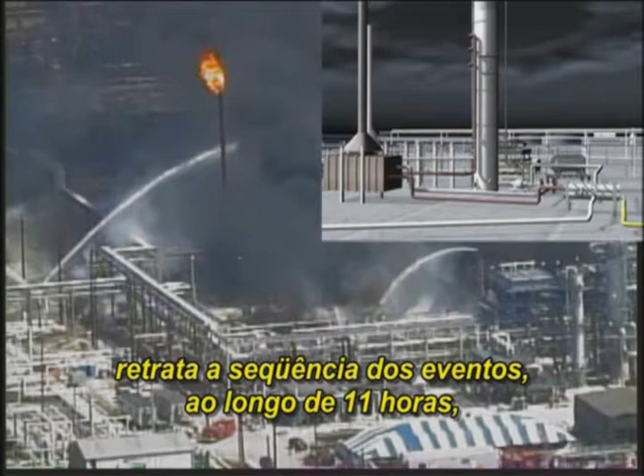The following CSB computer animation depicts the sequence of events over an 11-hour period leading to the explosion at the BP Texas City refinery on March 23, 2005.

Several units at the Texas City refinery had been shut down for lengthy maintenance projects, which required nearly 1,000 contractors to be on site along with BP employees.

BP had positioned a number of portable trailers close to process units for the use of contractors and other maintenance workers. Over a period of months, BP had located 10 trailers for workers servicing the ultra-cracker unit, including a double-wide wood-frame trailer that contained 11 offices and was regularly used for meetings.

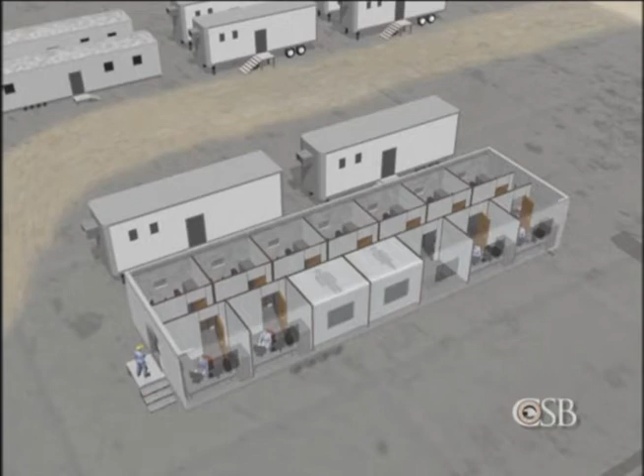Though these trailers were located near the isomerization unit, the occupants were not warned the ISOM unit was about to start up, a potentially hazardous operation.

At 2:15 a.m. on March 23rd, overnight operators began introducing flammable liquid hydrocarbons, known as raffinate, into a 170-foot tall raffinate splitter tower used to distill and separate gasoline components.

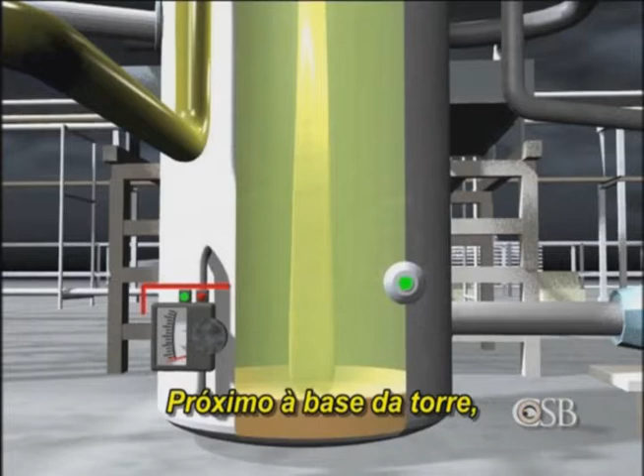Near the base of the tower, there was a single instrument that measured how much liquid was inside. It transmitted this information to a central control room located away from the ISOM unit. But this level indicator was not designed to measure liquid above the 9-foot mark.

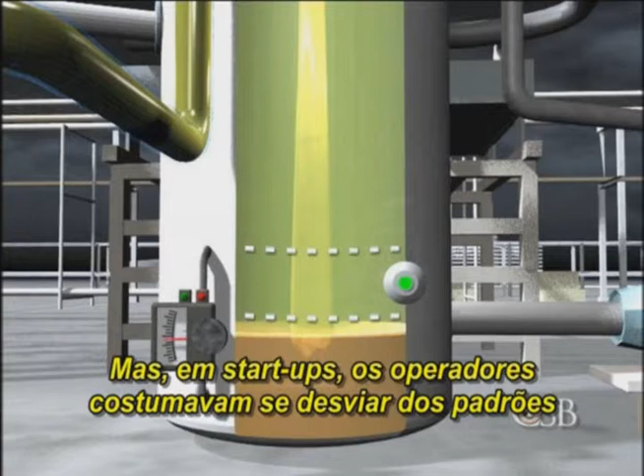During normal operation, the tower was only supposed to contain about 6.5 feet of liquid. But during startups, operators routinely deviated from written procedures and filled the tower above the 9-foot mark, concerned that if the liquid level fluctuated too low, it would cause costly damage to the furnace.

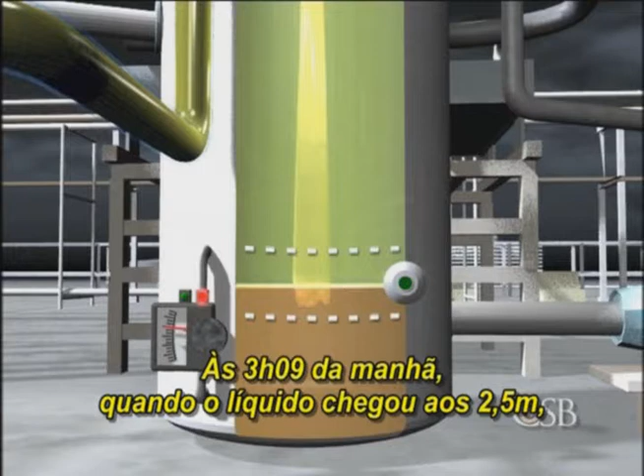At 3:09 a.m., as the liquid neared the 8-foot mark, a high-level alarm activated and sounded in the control room. But a second high-level alarm, slightly further up the tower, failed to go off.

By 3:30 a.m., the level indicator showed that liquid had filled the bottom 9 feet of the tower, and the feed was stopped. The CSB later estimated that the liquid was, in fact, at a height of 13 feet. But operators could not know the actual level because the indicator only measured up to 9 feet.

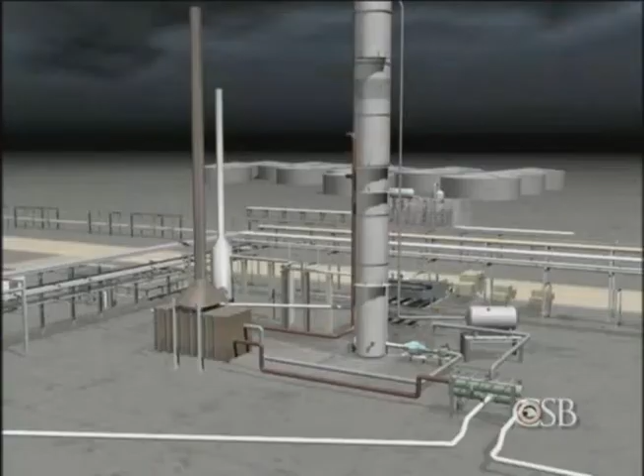The lead operator had been overseeing the startup from a satellite control room within the ISOM unit. At 5 a.m., he briefly updated the night board operator in the central control room about the startup activities. The lead operator then left the refinery early, an hour before the end of the shift.

A new board operator arrived in the control room around 6 a.m. to start his 30th day in a row working a 12-hour shift. He spoke briefly with the departing night shift operator and then read the logbook to prepare for the startup. But the logbook did not clearly indicate how much liquid was already in the tower and equipment, and it left no instructions on routing of the liquid feed and products when the startup resumed. Instead, the control board operator only found a one-line logbook entry that said, ISOM brought in some RAF to unit to pack RAF with.

At 7:15 a.m., the day shift supervisor arrived. Because he was more than an hour late, he received no formal briefing from personnel on the night shift about conditions in the ISOM unit.

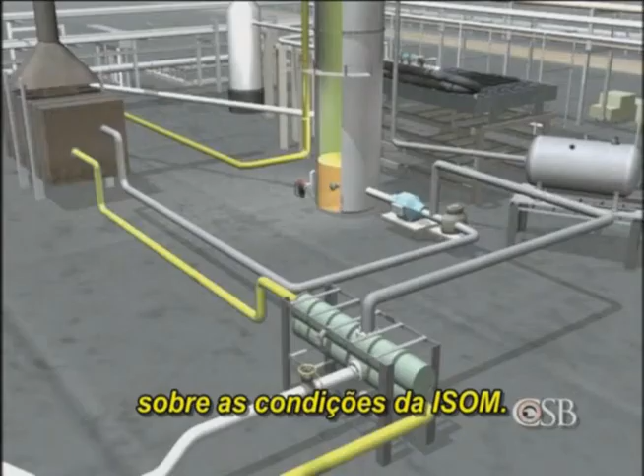At 9:51 a.m., operators resumed the startup. They began recirculating the liquid feed and adding more liquid to the already overfilled tower. As new feed was added, startup procedures called for regulating the liquid level in the tower using the automatic level control valve.

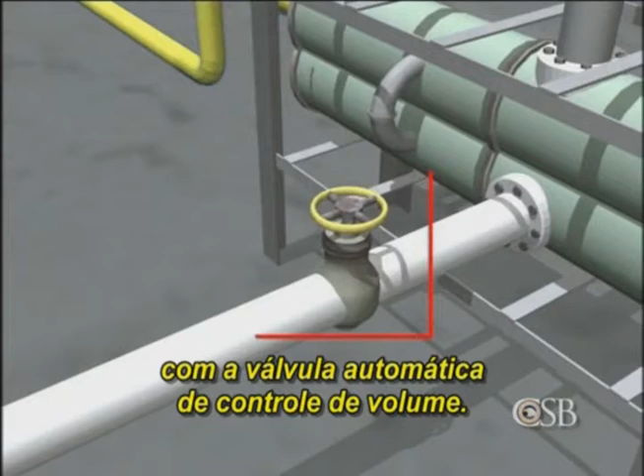But the board operator and others had received conflicting instructions on routing the product. As a result, this critical valve was left closed for several hours, blocking the flow of liquid from the tower.

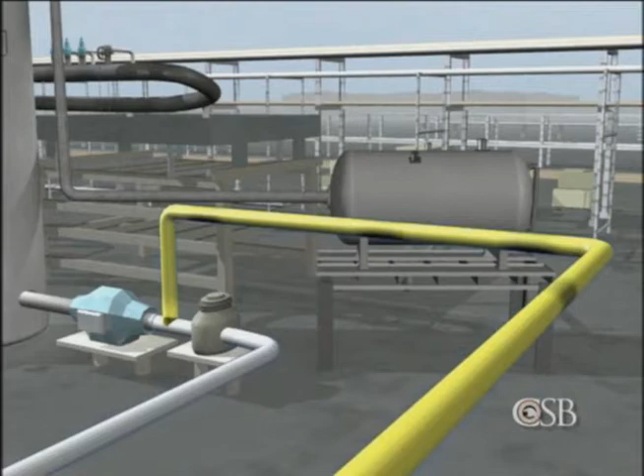A few minutes later, operators lit burners on the furnace to begin heating up the feed, part of the normal startup process. While the startup was underway, the day supervisor left the refinery on short notice just before 11 a.m. to attend to a family medical emergency.

Contrary to BP's own procedures, no experienced supervisor was assigned to replace him. This left a single control board operator, now without a qualified supervisor, to run 3 refinery units, including the ISOM unit, which needed close attention. The refinery had eliminated a second board operator position following corporate budget cuts in 1999 after BP acquired Amoco.

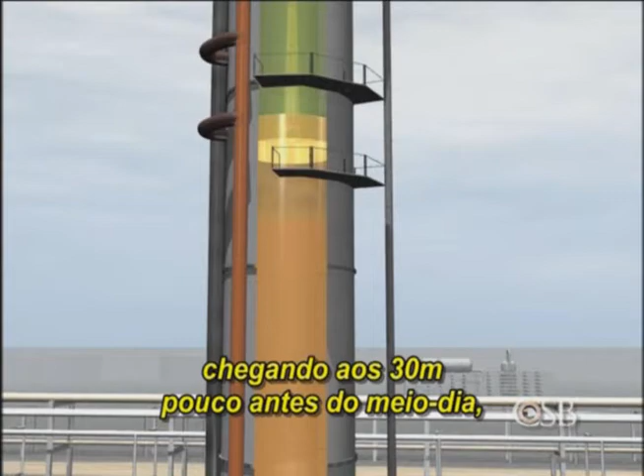As the startup continued, the tower steadily filled with liquid, reaching a height of 98 feet shortly before noon, more than 15 times the normal level.

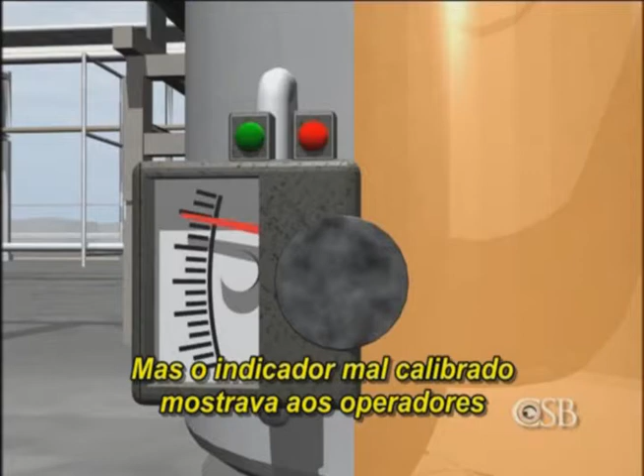But the improperly calibrated level indicator told operators in the control room that the liquid was at 8.4 feet and gradually falling. Furthermore, the control panel was not configured to clearly warn operators of the growing danger. It did not display flows into and out of the tower on the same screen, nor did it calculate the total liquid in the tower.

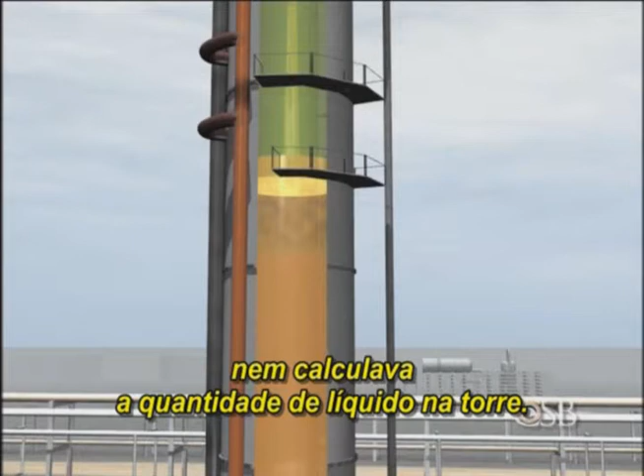Meanwhile, the maintenance contractors, who were not involved in the operation of the ISOM unit, left their work trailers to attend a company lunch, celebrating a month without a lost time injury.

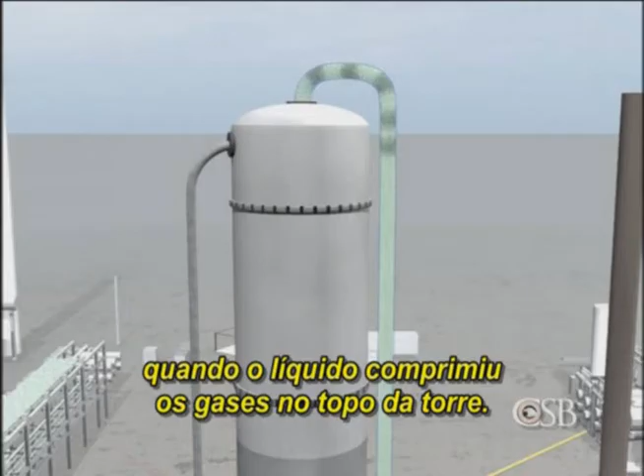At 12:41 p.m., an alarm activated as the rising liquid compressed the gases remaining in the top of the tower. Unable to understand the source of the high pressure, operators opened a manual chain valve to vent gases to the unit's emergency relief system, a 1950s-era blowdown drum that vented vapor directly into the atmosphere. Operators also turned off 2 burners in the furnace to lower the temperature inside the tower, believing this would reduce the pressure. Nobody knew the tower was dangerously full.

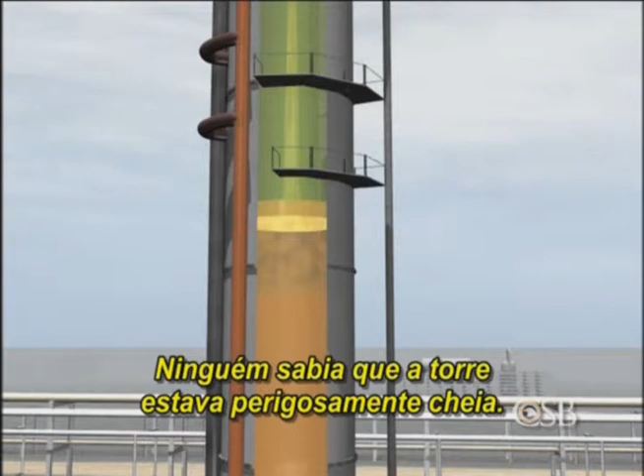The operators did become concerned about the lack of flow out of the tower and began opening the valve to send liquid from the bottom of the tower to storage tanks. But this liquid was very hot. As it flowed through the heat exchanger, it suddenly raised the temperature of the liquid entering high up the tower by 141 degrees Fahrenheit. It was now about 1 p.m.

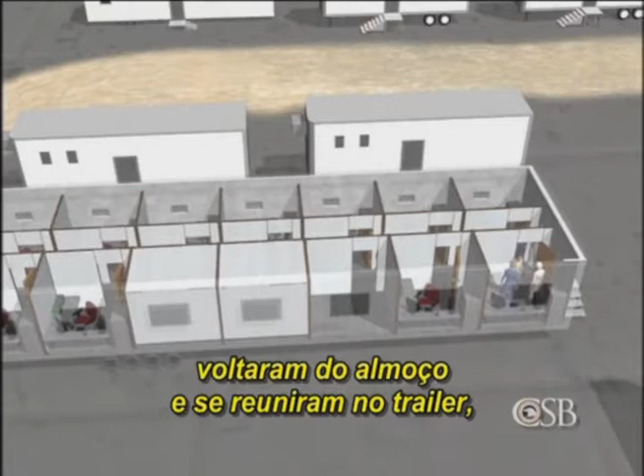Contract workers, unaware of the startup and the looming danger, returned from lunch and began a meeting in the double-wide trailer in the corner room closest to the blowdown drum.

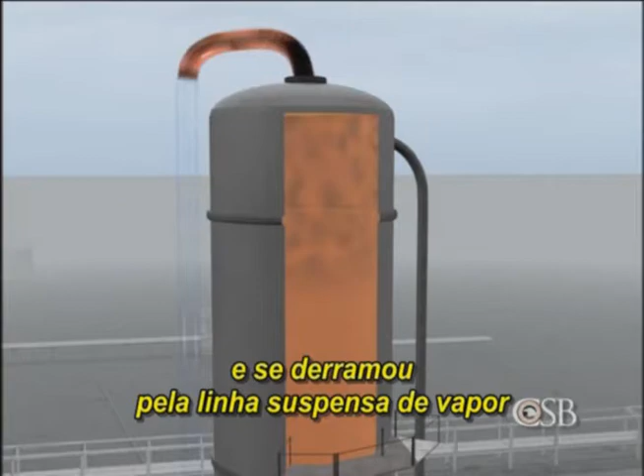Over the next few minutes, the hot feed entering the tower caused the liquid inside to start to boil and swell. Liquid filled the tower completely and began spilling into the overhead vapor line, exerting great pressure on the emergency relief valves 150 feet below.

At 1:14 p.m., the 3 emergency valves opened, sending nearly 52,000 gallons of flammable liquid to the blowdown drum at the other end of the ISOM unit.

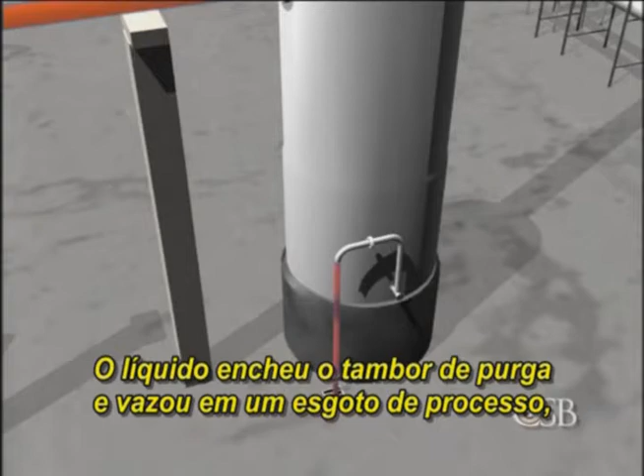Liquid rose inside the blowdown drum and overflowed into a process sewer, setting off alarms in the control room. But the high-level alarm on the blowdown drum failed to go off. None of the operators knew of the catastrophe unfolding in the ISOM unit.

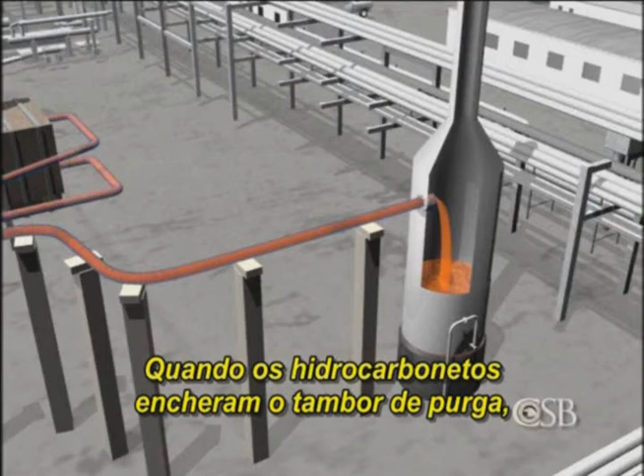As flammable hydrocarbons overfilled the blowdown drum, operators nearby saw a geyser of liquid and vapor erupt from the top of the stack. The equivalent of nearly a tanker truck full of hot gasoline fell to the ground and began forming a huge flammable vapor cloud.

This scene, based on CSB computer modeling, shows how the vapor cloud expanded in just 90 seconds, engulfing the unit and the nearby trailers full of workers.

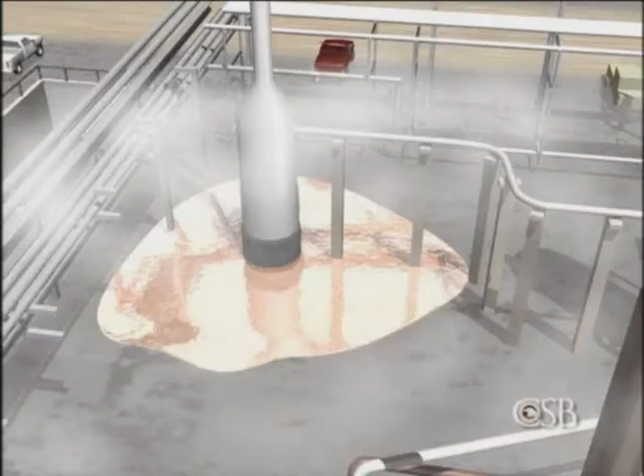About 25 feet from the base of the blowdown drum, 2 workers were parked in a pickup truck with the engine idling. As flammable vapor entered the air intake, the diesel engine began to race. The 2 workers fled, unable to shut off the engine.

Moments later, witnesses saw the truck backfire and ignite the vapor cloud. Powerful explosions swept through the area.

Computer modeling shows how the blast pressure wave accelerated through the ISOM unit, causing heavy destruction and igniting fires throughout the area. The workers inside the trailers were right in the path of the explosions. The fires continued to burn for hours.

12 of the 20 occupants of the double-wide trailer were killed, along with 3 workers in a trailer nearby. Dozens of others suffered serious burns, fractures, and other traumatic injuries. The wood and metal frame trailers were blown apart by the blasts.

Firefighters struggled to rescue the injured and recover the victims. 50 large chemical storage tanks were damaged, and the ISOM unit remained shut down for more than 2 years.

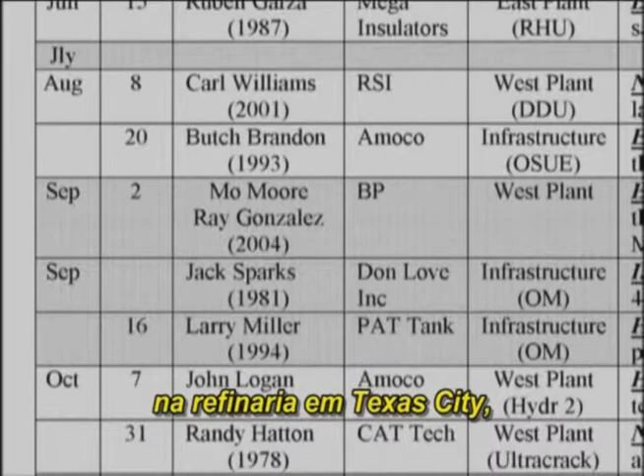During the early stages of our investigation, our team had noted there were multiple safety system deficiencies at the Texas City plant. We also found there was a history of fatalities at the plant. Prior to the March 2005 accident, 23 people died in accidents over a 30-year period at the Texas City refinery, beginning when it was owned by Amoco and continuing after BP acquired the refinery in 1999.

The CSB wanted to know what the connection was between this history of fatal incidents and the organizational and cultural factors. BP Corporation's lack of focus on preventing major accidents allowed budget cuts to be made without assessing the impact on process safety. The CSB found that cost-cutting, production pressures, and failure to invest significantly impacted the process safety performance at the Texas City refinery and left the refinery vulnerable to catastrophe.

After the merger with Amoco, BP ordered a 25% reduction in fixed costs at all its refineries. This impacted important process safety systems such as staffing, training, and mechanical integrity.

The effects of the budget cuts became apparent in a number of internal BP documents made public following the accident. In one, the refinery manager was quoted as having observed in 2002 that the infrastructure at Texas City was in complete decline. He ordered a study of the refinery's safety and mechanical integrity, a study which was shown to BP executives in London.

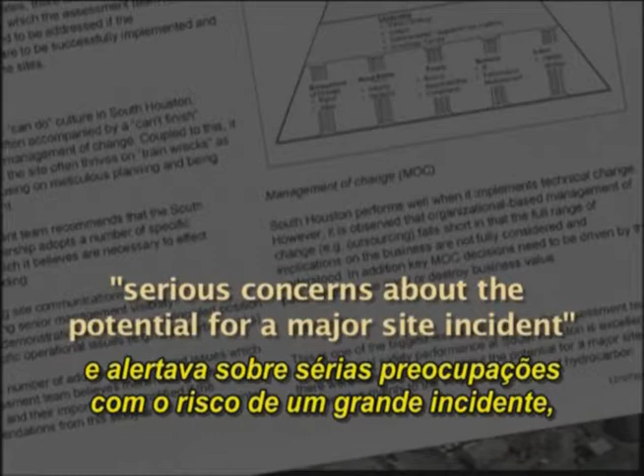That study warned of serious concerns about the potential for a major site incident following more than 80 hydrocarbon releases in the previous 2 years. The study also concluded that its own findings were urgent and far-reaching.

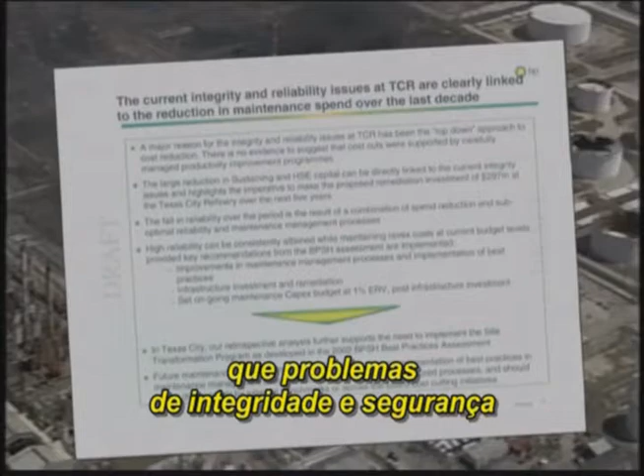A follow-up BP study in 2002 found the refinery's integrity and reliability issues were clearly linked to the reduction in maintenance spend over the last decade. In 2003, a maintenance assessment stated that cost-cutting measures have interfered with the group's work to get things right.

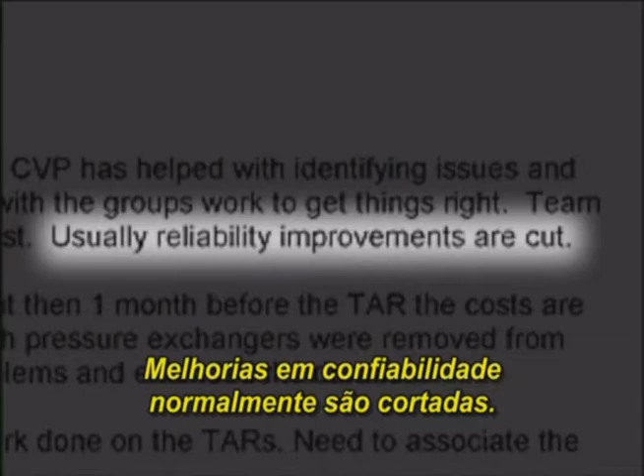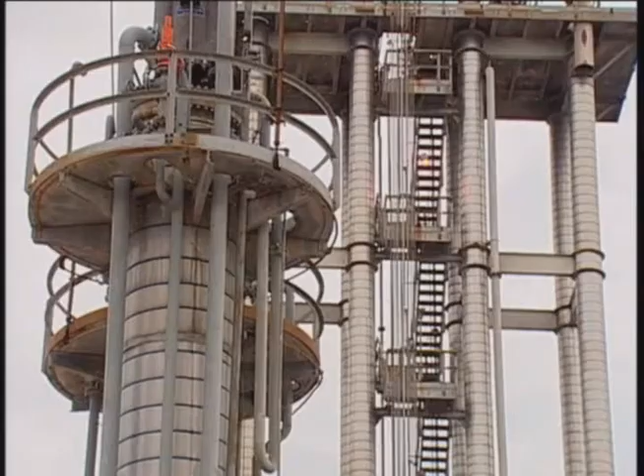Usually, reliability improvements are cut. And later that year, a company audit found the current condition of the infrastructure and assets is poor at Texas City, and that maintenance spending was limited by a checkbook mentality. Only the money on hand would be spent, rather than increasing the budget.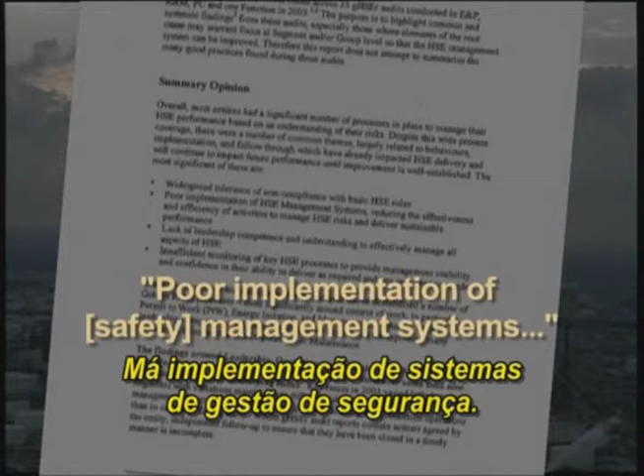In March 2004, BP auditors in London concluded that 35 business units around the world, including the Texas City refinery, suffered from a host of common safety problems, including widespread tolerance of non-compliance with basic HSE, or health, safety, and environmental rules, poor implementation of safety management systems, and lack of leadership competence and understanding.

There were a number of reports that were coming up to as high as the board level that indicated serious problems throughout the BP system. During 2004, the Texas City refinery had 3 major accidents.

In addition to this process unit fire that caused $30 million in damage, two other accidents in 2004 resulted in three fatalities. Yet this same year, the refinery had its lowest ever recordable injury rate, a statistic that does not include fatalities.

The CSB found that maintenance spending increased between 2003 and 2004, but most of the increases were for responding to serious accidents and complying with environmental requirements, not for preventive maintenance.

Late in 2004, the Texas City refinery manager made a presentation to supervisors titled 'Safety Reality,' reviewing fatalities at the plant over the past 30 years. One of the slides was entitled, 'Texas City is not a safe place to work.'

BP did its own safety culture survey just prior to the accident. That survey indicated there was an exceptional degree of fear among employees of a major catastrophe. Among the findings: pressure for production, time pressure, and understaffing are the major causes of accidents at Texas City.

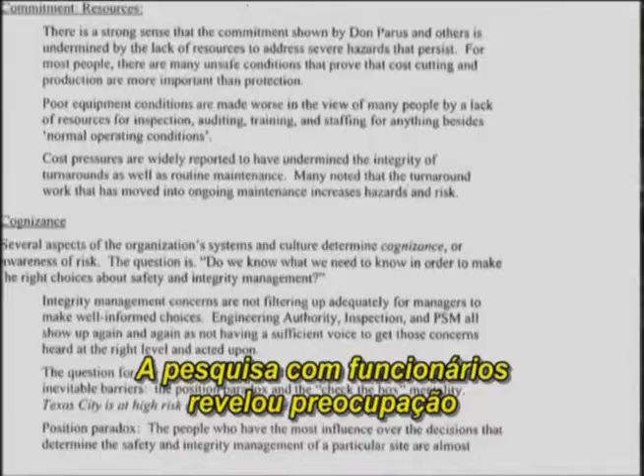The survey of Texas City employees also found concern about safety and equipment checks potentially left undone. There was a check-the-box mentality, which indicated that personnel would go through the motions with various policies and procedures, but the work would not be conducted.

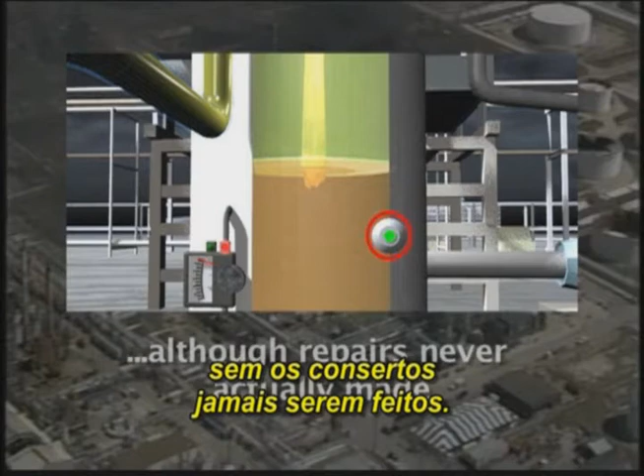For example, the tower high-level alarm had been reported as not functioning several times in the two years prior to the accident, but maintenance work orders for this alarm were closed, although the repairs were never actually made. Work orders could be closed out as completed, even though the work hadn't been performed.

This is important because we found that on the day of the incident during the ISOM startup, there were a number of instruments and equipment that were not functioning properly.

On February 20th, 2005, a company safety manager wrote, 'I truly believe we are on the verge of something bigger happening.' Then, three weeks later, a BP business plan recognized a number of key safety risks, including that TCS, or Texas City site, kills someone in the next 12 to 18 months. Eight days later, those fears were realized.

Here were these warnings. These audits were sounding very clear warnings. So why weren't they attended to? I think my feeling is that Texas City was virtually paralysed by the cost-cutting which had occurred at that site, and they were simply unable to respond to those warnings.

There needs to be somebody on the board of directors who can interpret those reports and be in a position to drive change effectively. The CSB's final report recommended that BP appoint an additional non-executive member of the board of directors with specific expertise in refinery operations and process safety.

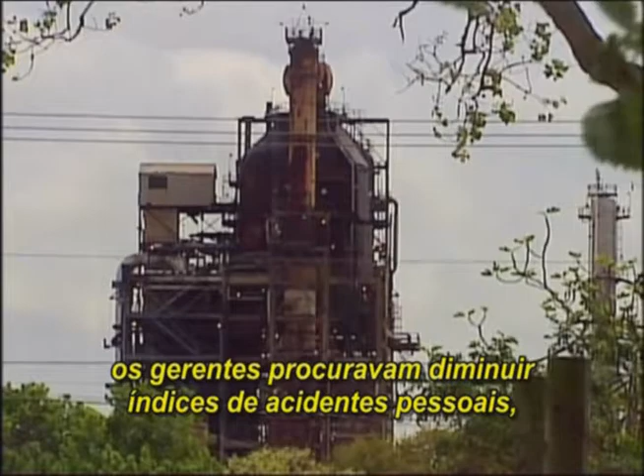So the problem at Texas City was that they were essentially blind to this issue of process safety. They were focusing on personal safety. The CSB concluded that over a period of years, BP managers focused on lowering rates for personal injuries, such as slips, trips, and falls, while often disregarding key process safety indicators.

We as members of the travelling public intuitively understand that the numbers of baggage handling injuries really tell us nothing about the likelihood of a major accident, an aircraft crash, and no airline in its right mind is going to try to convince the travelling public of how safe it is by telling you about its workforce injury statistics.

Dr. Trevor Kletz is an internationally recognized chemical process safety expert.

Process safety deals with fires, explosions, toxic releases and things like that. You can have a very good accident rate for what we call hard hat accidents, but not for process ones. There was a whole series of incidents occurring at BP in the years prior to the accident: gas releases, other kinds of releases, fires, all of which were telling you that process safety was not well managed.

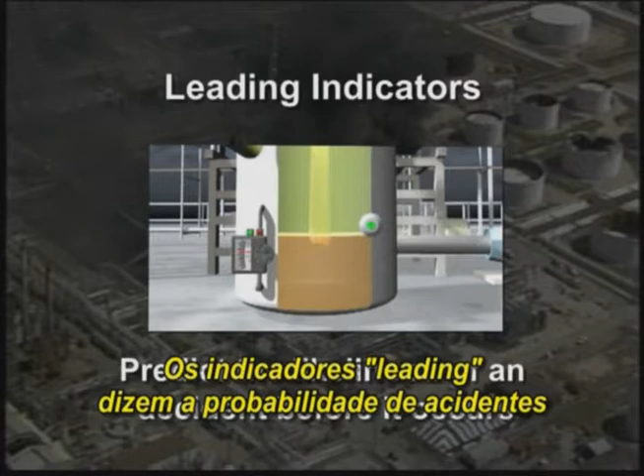You need to measure process safety performance with the appropriate indicators, both leading and lagging. Lagging indicators measure events that have already occurred, such as fires, explosions, and equipment failures. Leading indicators are designed to predict the likelihood of an accident before it occurs, for example the percentage of equipment inspections that are overdue. The opening of a safety pressure relief valve is itself an indicator that things are not as they should be, so we should count those and try to reduce the number of occurrences of those sorts of events.

But the investigation found that BP did not effectively use leading and lagging indicators to measure and drive process safety performance. For example, BP's pay plan rewarded managers primarily for controlling costs. The only safety metric used to calculate bonuses was the personal injury rate. Process safety was not considered.

The CSB final report recommended that the United Steelworkers Union and the American Petroleum Institute create a new standard for process safety indicators for the petrochemical industry. The board also called on BP to use leading and lagging indicators to strengthen refinery safety performance.

After an accident, managers often say, "I didn't know this was happening," or not happening, as the case may be. "If I'd known, I'd have stopped it." Now, this is bad management. It's the manager's job to know what is going on, and he can do that by going round, by keeping his eyes open, and reading the accident reports in detail.

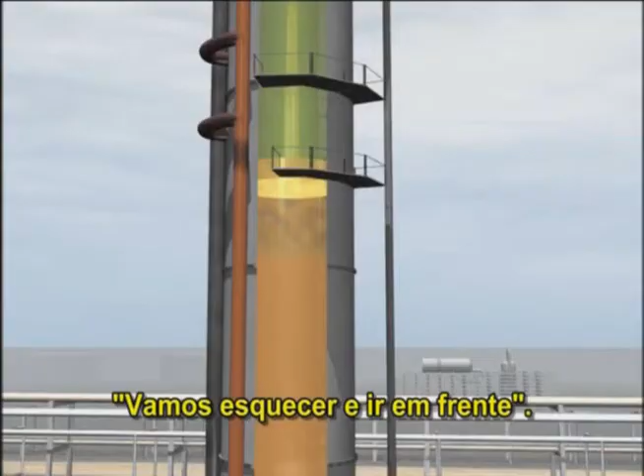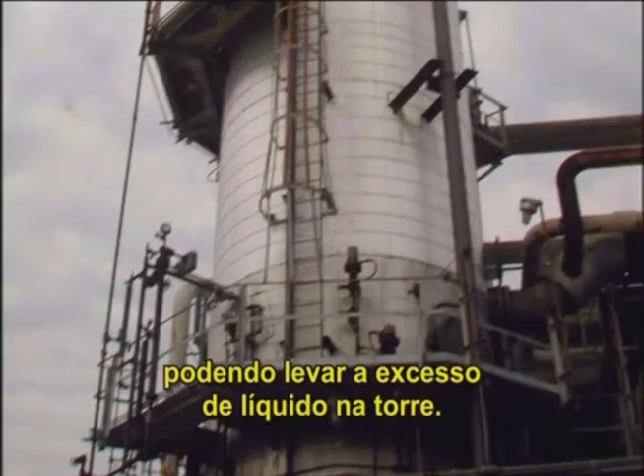For example, BP wasn't investigating abnormal conditions that were occurring repeatedly during startups of the ISOM unit. The CSB examined 19 previous startups in the 5 years prior to the incident and found that in the vast majority, operators ran the level above the range of the level transmitter. The problem is that you don't know how high the level really is, which can lead to grossly overfilling the tower. Even though high levels and pressures could have led to a catastrophic accident, the previous startups were never investigated as near misses, and procedural deviations became accepted as normal.

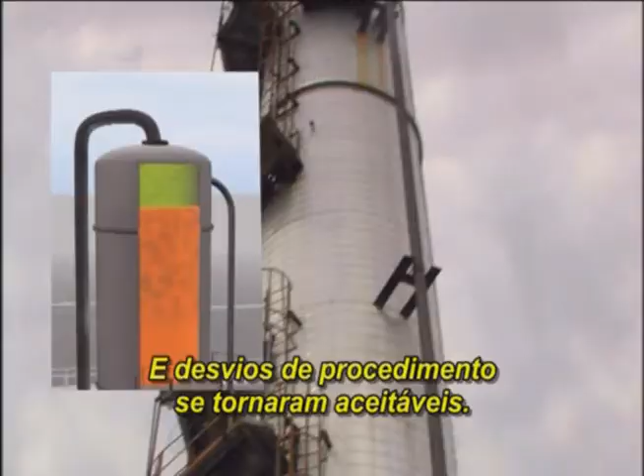The CSB investigation also found 8 serious releases of flammable vapor from the ISOM blowdown drum, 2 of which caught fire, between 1994 and 2004. Only 3 of the incidents were ever investigated. It's widely recognized now that you should investigate near misses, or near accidents, as thoroughly as you investigate accidents. After all, it's only a matter of luck whether a leak of flammable liquid or gas catches fire or not. In our final report, the CSB recommended that BP's Board of Directors establish a system to encourage reporting of incidents without fear of retaliation, to investigate and implement prompt corrective actions, and to communicate lessons throughout the company.

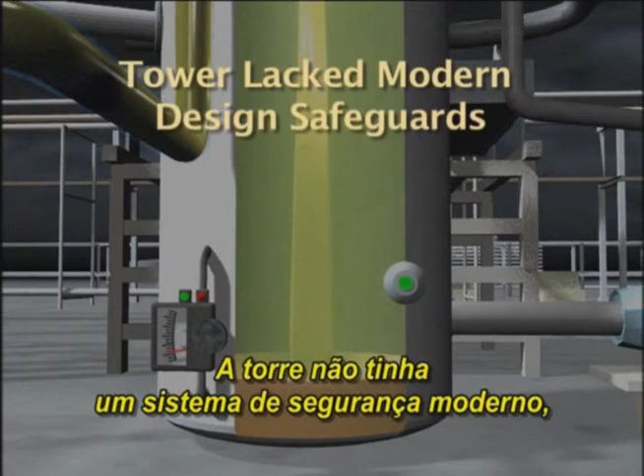The first choice after an accident is to say, how can we improve the design so this can't happen? How can we remove the opportunity for errors? Even as releases occurred over many years in the ISOM unit, BP continued using equipment based on outdated designs. The raffinate splitter tower lacked modern design safeguards, such as redundant level indicators and alarms, a differential pressure indicator, and automatic interlocks to prevent overfilling. In a well-designed plant, a simple error like closing the wrong valve shouldn't result in an accident. The design of the emergency pressure relief system was also outdated.

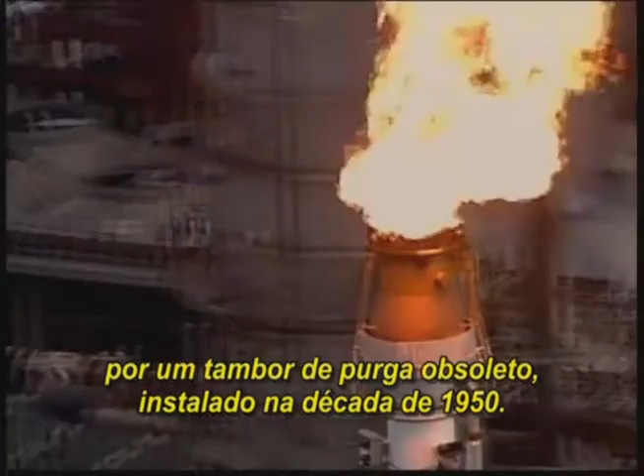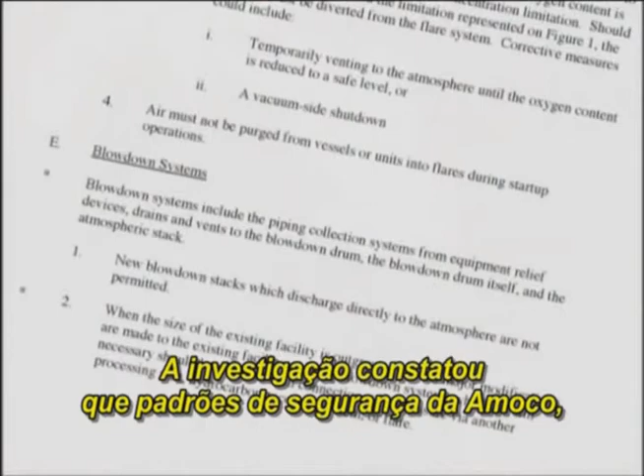Relief valves vented hydrocarbons directly to the atmosphere through an antiquated blowdown drum, first installed in the 1950s. The CSB report said the hydrocarbons should have been routed to an inherently safer disposal system, such as a flare, to contain the hydrocarbon liquid and burn off flammable vapor. In fact, the investigation found that Amoco's own safety standards, later adopted by BP, stated that new blowdown stacks which discharge directly to the atmosphere are not permitted, and that as facilities were upgraded, existing blowdown systems which are still necessary should be replaced.

On several occasions prior to the incident, BP had seriously considered connecting a flare to the ISOM unit. In the early 1990s, when Amoco owned the refinery, 3 proposals were made to replace blowdown stacks at Texas City. 2 more proposals were made in 2002, after the merger with BP. However, these decisions were impacted by production pressures and budget cuts, and the flare was never constructed.

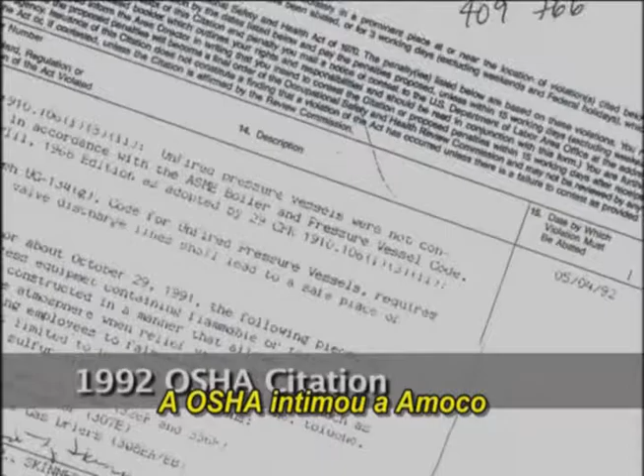In 1992, OSHA conducted an inspection at the Texas City refinery because there had been a release from a very similar blowdown drum in a different process unit. OSHA cited the then Amoco refinery for the unsafe blowdown system, determining that the design was unsafe because it relieved to atmosphere instead of to a safe place. But OSHA later withdrew the citation after Amoco asserted the equipment conformed to American Petroleum Institute standards.

In October 2006, the board issued a recommendation to the American Petroleum Institute calling for new guidelines that warn against the use of blowdown drums similar to those found in Texas City. We also recommended that OSHA implement a national emphasis program for all oil refineries focused on the hazards of blowdown drums that release to the atmosphere. Whenever possible, companies should use inherently safer systems, such as flares, instead of blowdown drums.

The presence of occupied trailers near the blowdown stack added to the hazards of venting flammable material to the atmosphere. Prior to the incident and prior to the startup of the ISOM unit, a number of occupied trailers had been placed close to the ISOM unit.

These trailers were occupied by workers who were not involved in the turnaround activities in the ISOM unit. The investigation found this was a key factor leading to the deaths of the workers. They were right on top of the process, in trailers as close as 120 feet from the blowdown drum, which is right at the edge of the isomerization process.

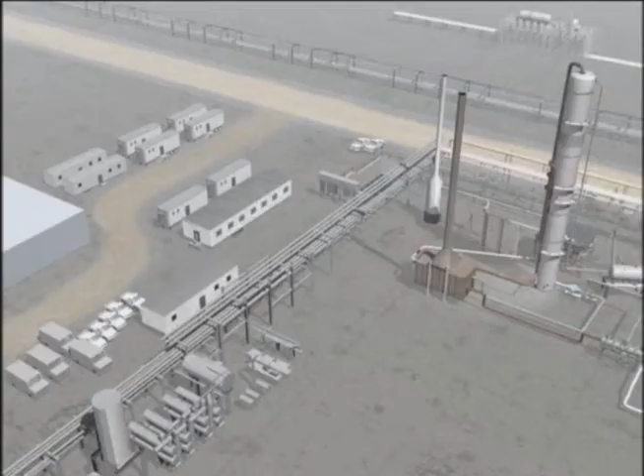During an explosion in a refinery, you're actually safer in the open atmosphere than if you were working inside of a trailer. This is because the explosion overpressure will destroy the weak trailer construction, resulting in the formation of missiles and walls collapsing, which is potentially fatal to the occupants.

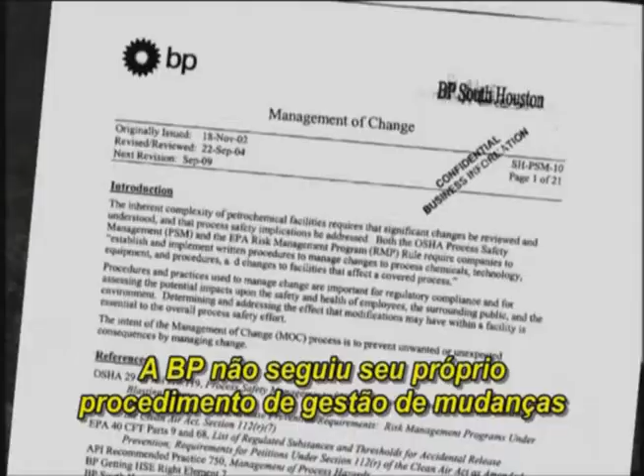The CSB determined that industry siting guidelines did not adequately protect trailer occupants from the fire and blast damage that can occur hundreds of feet from an explosion like the one at BP. We found that these guidelines were not safe enough prior to this accident and resulted in placing people in harm's way. In addition, BP did not follow its own management of change procedures before placing most of the trailers in a dangerous location.

They did not assess the blast hazards posed to the trailers, and action items that were created during the review were never followed up and corrected. Ultimately, the decision on where to place the trailers was largely based on convenience, not safety.

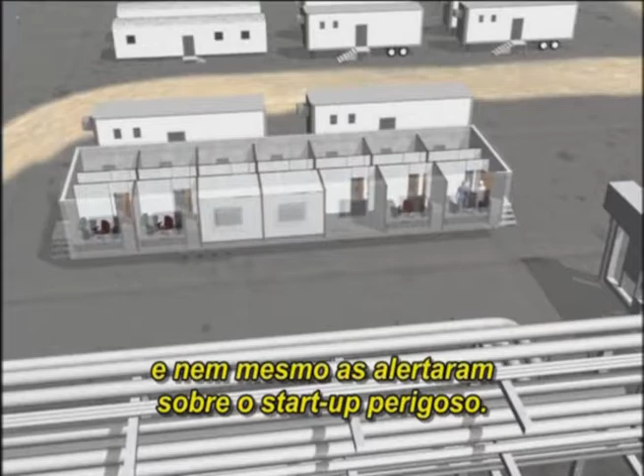Contrary to BP startup procedures, on the morning of March 23rd, managers did not remove personnel from the nearby trailers or even alert them that the potentially hazardous startup was taking place.

The explosion totally destroyed 13 trailers and damaged 27 others, some as far away as 1,000 feet. People inside trailers as far away as 479 feet were injured.

In October 2005, the CSB issued an urgent recommendation to the American Petroleum Institute to revise industry standards and establish minimum safe distances for occupied trailers away from hazardous process areas. On June 21, 2007, the American Petroleum Institute issued new industry guidelines to minimize the presence of people and occupied trailers in hazardous process areas.

For a long time, people were saying that most accidents were due to human error. And this is true in a sense, but it's not very helpful. It's a bit like saying that falls are due to gravity. There were a number of human errors that contributed to the overfilling of the tower and the disaster that followed at Texas City. No one shows up to work planning to make mistakes.

So we looked at the conditions in the workplace that would make error more likely. You really need to look at why the operators did what they did. CSB Human Factors Specialist Cheryl MacKenzie.

There were a number of human factors issues involved with this incident, including fatigue of the workers, training that was insufficient, and procedural deviations that occurred during the startup.

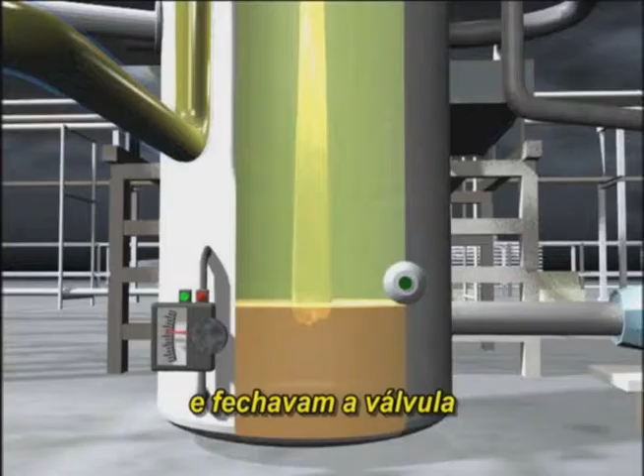To do this, they placed the level control valve in manual, not the automatic mode required by procedures, and left the valve closed to raise the liquid above the recommended 6.5-foot level.

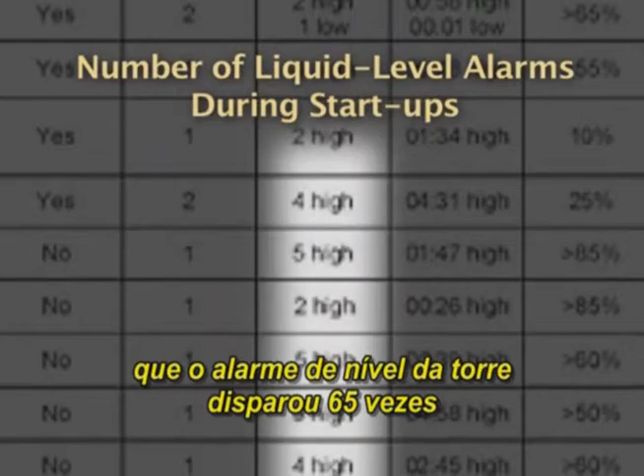So routine had this practice become, the CSB found that the tower's high-level alarm had activated 65 times during the previous 19 startups. The outdated operating procedures for the unit did not establish any safe upper limit for the liquid level in the tower. Unknown to operators, regularly overfilling the tower had serious risks.

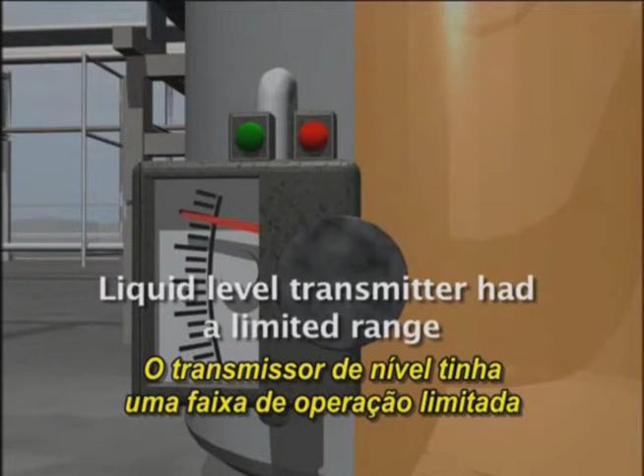The tower's liquid level transmitter had a limited range, and should the liquid rise above the maximum reading of 9 feet, operators could not know if the tower was dangerously overfilling. This informal practice of running the level in the raffinate splitter tower above the range of the transmitter led to running blind.

They weren't aware of the dangers of overfilling the column, and so they tended to err on the side of what they saw as caution by overfilling the column. So their systematic deviation from what they should have been doing was actually well-intentioned. It was with the interests of the company at heart that they were violating the startup procedures.

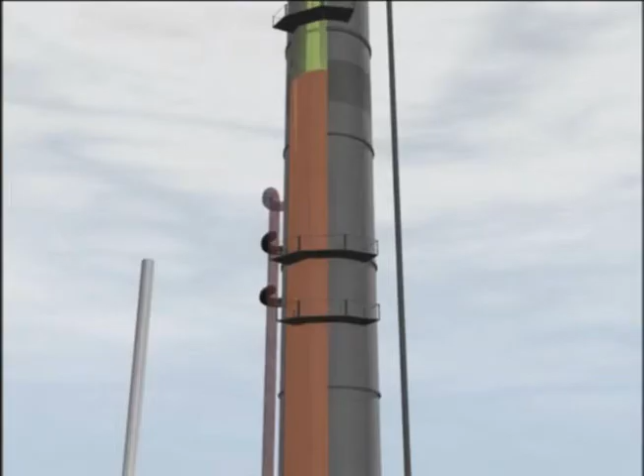But on the day of the accident, the routine deviation, overfilling the tower above the range of the indicator, coincided with a number of instrument failures, which impaired the board operator's decision-making. This had tragic results, as the board operator lost awareness of just how high the level was.

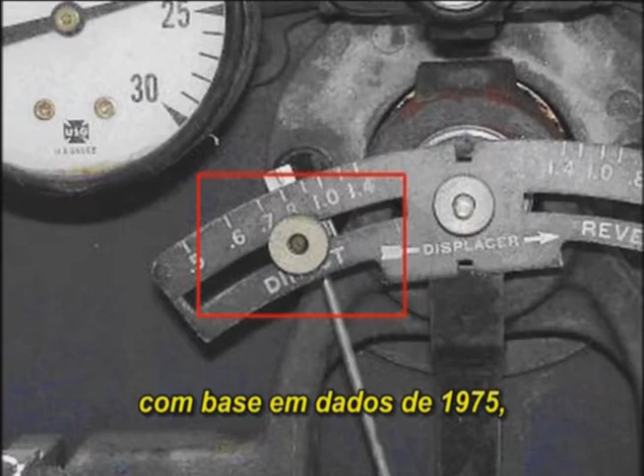The tower level indicator had been calibrated for years based on 1975 data for a different liquid used in a different process. As a result of the miscalibration, the indicator showed the level in the tower was declining just prior to the explosion, when it was actually increasing.

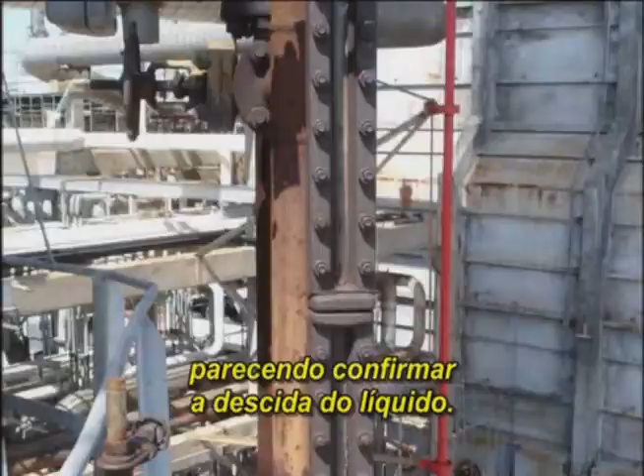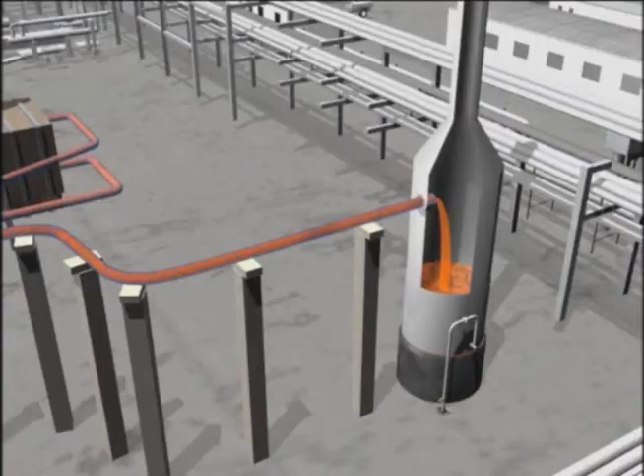And a backup high-level alarm on the tower failed to activate, seeming to confirm that the liquid level was dropping. A sight glass on the tower was dirty and unreadable and could not be used to visually check the liquid level. The investigation concluded that the board operator truly had no functional and accurate measure of the tower level on March 23, 2005.

And when the liquid finally did spill over into the blowdown drum, the high-level alarm there failed to go off. BP procedures required that alarms and instruments and other equipment be checked for their functionality prior to startup. The CSB determined that these checks were largely not performed.

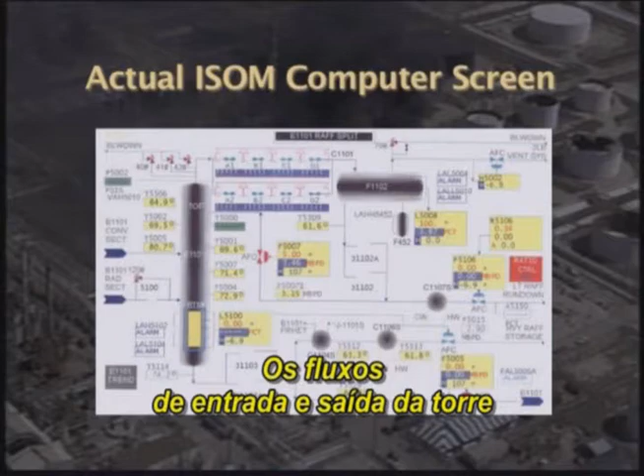A poorly designed computer display in the control room added to the difficulty of determining if the splitter tower was overfilling. Liquid flows into and out of the tower were not shown on the same screen, even though the computer could have been configured to do so.

The investigation also found that communication problems among BP personnel during the morning of the startup increased the likelihood of errors. Operators received contradictory instructions on where to send the products from the tower, and the day shift operators never got clear information from the night shift about how much liquid the tower already contained.

Well, then the board operator and the other operators that came in during the day shift really didn't understand what had occurred the night before. So they're starting up this unit without full knowledge of the state of the unit, and they're making judgments and decisions based on incomplete information.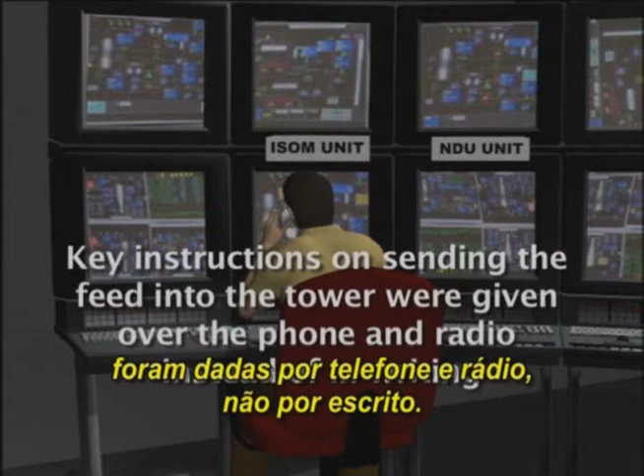The investigation found that BP lacked adequate policies and a management emphasis on effective communications. Key instructions on sending the feed into the tower were given over the phone and radio instead of in writing. Operators later told investigators these verbal communications were rushed and vague. Written communications in the logbook were brief and unclear.

Night shift operators did not conduct a crucial face-to-face meeting to brief day shift operators on the conditions in the unit. Therefore, they didn't realize how much liquid was in the tower and the equipment, so they added more, which led to the subsequent overfilling of the tower, which later led to the release.

The opportunities for human error were multiplied by the lack of adequate supervision, staffing, and training at the refinery. Training had been downsized, and that training was largely delivered through computerized means rather than face-to-face training. BP did not train operators on the hazards of overfilling towers, and training for abnormal situations was insufficient.

Despite recommendations dating back 5 years, simulators were not used to train board operators on making critical decisions. As noted in an internal BP email about simulators 3 weeks after the accident, 'big pushback has always been initial cost.' Budget pressures also impacted control room staffing.

BP implemented a 25% cost reduction in '99. During the same time period, BP downsized the board operators in the ISOM unit from 2 to 1. Later, BP added an additional process unit to the responsibilities of the board operator in the ISOM unit. The result was that you had 3 complex refinery units under the supervision of one board operator.

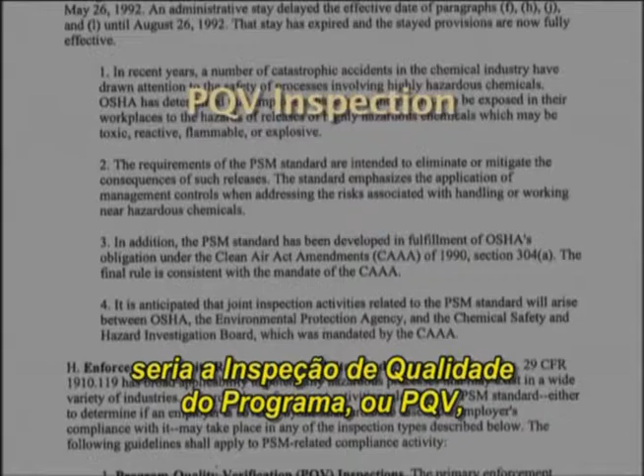OSHA's enforcement program for the PSM regulations requires planned, comprehensive inspections of facilities with accident histories or other indications of catastrophic risks. A 1992 OSHA directive stated the primary enforcement tool would be the Program Quality Verification Inspection, or PQV, a large, complex audit involving highly trained OSHA inspectors and taking weeks or months to complete.

Despite the fact that the BP Texas City refinery had a long history of fatality incidents, there was no program quality verification or intensive PSM inspection conducted at that refinery. OSHA did conduct smaller, unplanned inspections of the Texas City refinery in response to accidents and complaints, but these inspections did not uncover major flaws in process safety management compliance.

In fact, the CSB found that OSHA conducted only a handful of program quality verification, PQV, inspections at the thousands of regulated facilities across the country. There's no set interval when OSHA comes in and inspects a plant in the United States. We found that inspections in the U.S. are largely driven by personal injury statistics.

The CSB also found that prior to March 2005, the EPA never audited the Texas City refinery for compliance with risk management requirements. Other jurisdictions inspect process plants more frequently.

In California's Contra Costa County, a local process safety ordinance requires thorough inspections of 48 major oil and chemical plants every 3 years by a team of specialized engineers. In the United Kingdom, 105 specialists from the Health and Safety Executive inspect high-hazard facilities every 5 years. In addition, all 9 refineries in the UK are inspected annually.